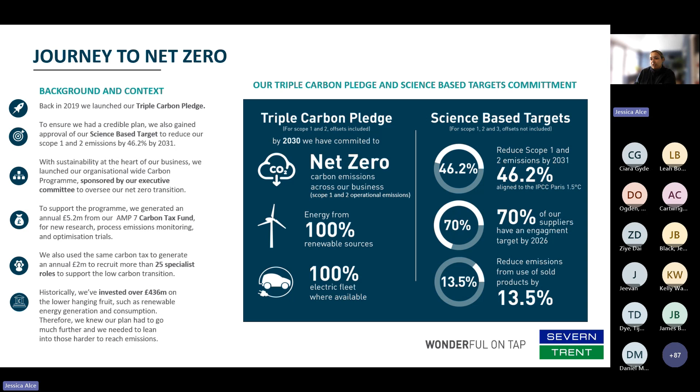In terms of where emissions come from, so just a bit of insight into that. Across wastewater treatment works, we have 3 types of emissions. First of all, it's carbon dioxide, and that is heat needed for some of our treatment processes, specifically our anaerobic digestion plants or our thermal hydrolysis plants which need natural gas to keep to the temperatures. We also have nitrous oxide, which is 280 times more potent than carbon dioxide, and that is emitted from our biological treatment processes.

We have fugitive biomethane, so the anaerobic digestion plants that we have produce biogas, which is a valuable resource, but sometimes leak methane into the atmosphere. In terms of scope 2, when we run our processes, we need to use that electricity.

So we do aim to produce that ourselves, or we buy REGO backed electricity, which means it's renewable energy guarantees of origin. In terms of scope 3, this is chemicals that we have to remove nutrients that can't go into the water course, such as phosphorus, and any embedded carbon, such as the concrete we have to build our assets.

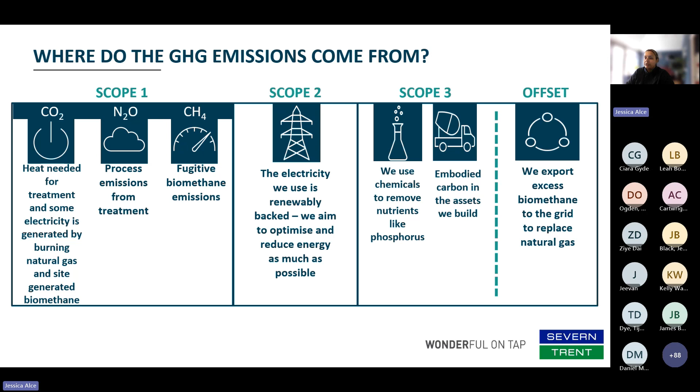And in the offset world, we do export any excess electricity or biogas to the grid. This then displaces fossil fuel-based gas and gives us what we call an offset. To give you some pictures of where we actually see these emissions on the site.

Our nitrous oxide byproduct is produced during nitrification or denitrification of wastewater treatment. This is emitted from activated sludge plants, trickling filters and nitrifying filters that we have on most of our bigger, larger wastewater treatment works. Methane is produced from our anaerobic digestion, and it's emitted from uncovered sludge holding tanks, cake pads, or incomplete combustion, such as flaring boilers or combined heat and power engines.

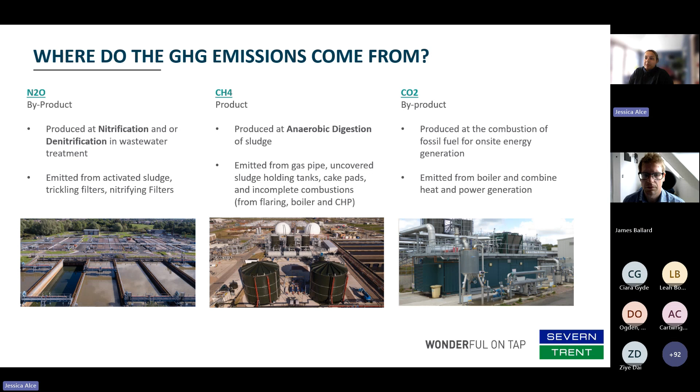As I mentioned earlier, carbon dioxide is mainly used for energy on site. So what is the approach that Severn Trent has taken to combat our carbon emissions?

The first thing we did is all about understanding our emissions. We really invested heavily in a monitoring program to monitor 40% of all of our flow into our works. And from this, we started to understand that the emissions from our works are more than what the carbon accounting workbook used for the water industry reports.

To give you an example, we have data that's around 4 times what the standard emission factors used in the carbon accounting workbook show. And we have taken a priority to understand our baseline so that we can understand how we can reduce, remove, or replace and optimize to reduce those emissions.

The second thing we've done is make sure that we use a hierarchy of management priorities, all about understanding how you remove that carbon. So you should always reduce, replace, remove, and offset.

So in terms of our larger net zero target and our net zero hub, all the solutions that we have been able to implement are following this hierarchy. And finally, we've been developing the industry blueprint known as our net zero hub at Strongford in the Stoke-on-Trent area.

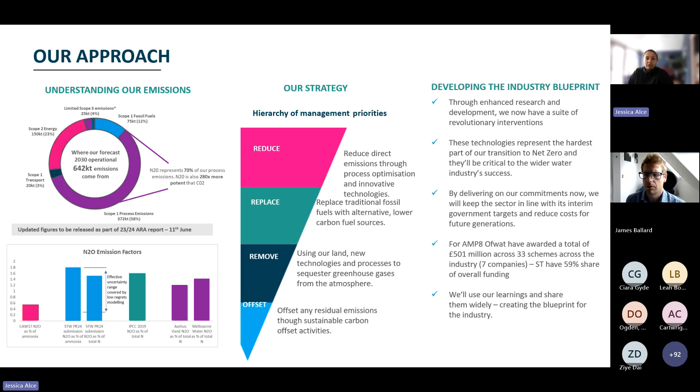So these are our modelled expenditure business cases. Ofwat awarded around 500 million across 33 schemes to deliver net zero, and of these 59% of that funding has come to Severn Trent through the technologies at the net zero hub, including the digital twin.

So just to quickly touch on the net zero hub. We've done a lot of work in carbon, we've done a lot of different trials, but the one thing that we really wanted to understand is how does that work in real life? How do you retrofit these technologies into aging assets, into live plants?

And the concept was to implement this at Strongford as a single flow sheet. This combines different types of technologies. We've got physical, biological, chemical, but we've also got the digital technologies, which is the digital twin.

So we're not going to be talking about the other technologies today. We're going to focus in on the digital twin. I'm now going to hand over to James to take you through what that means.

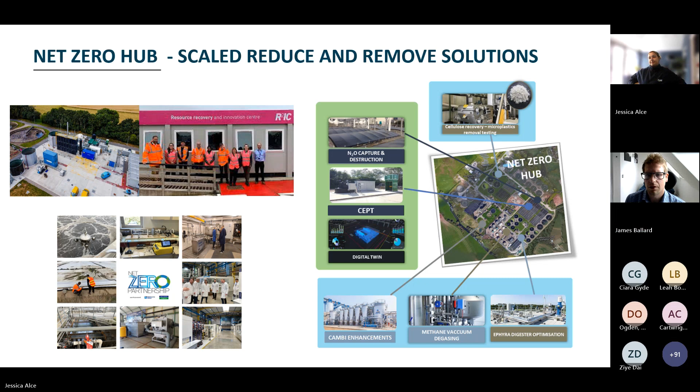Brill, thanks, Jess. Yep, hi everyone, James Ballard, Severn Trent as well as Jess. So strategic architect, and my background and focus is on control and automation.

So I'm here to open up the question that's on everyone's mind. What exactly is a digital twin and how does it fit into this story? And of course, I'm going to cut to the chase for you guys, because everybody's got a view and everybody's got a different answer for digital twins. So I'm going to be clear about what it means for us and set the scene for the rest of the presentation.

It's going to take you on our journey. So as a strategic architect, I need to take a step back and take a holistic view across the world that we're trying to build.

This is source to tap and drain to river. We're building a world where we're delivering really high quality drinking water and safely taking waste away.

So specifically think about the waste. You've got things like spills, floodings, pollutions, greenhouse gas emissions, energy, chemical. Across all of this source to tap, drain to river, we've got tens of thousands, possibly even hundreds of thousands of assets, pumps, valves. We've got treatment processes, we've got biological processes, we've got chemical processes.

So what we need to do is build a world where all of this is joined up and optimized. That's ultimately a world where we need to get to. So how does the digital twin fit in for us?

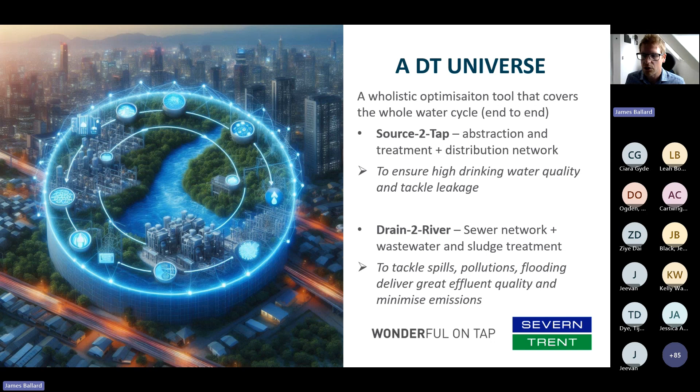We need to be building a tool that can interconnect, join, take data, simulate it, and create an optimization support that can help us really deliver. Because if you think about just how many variables there are, you've got the variables in all of your assets, your processes, environmental factors, weather. So there's a lot of variables, and we need some support.

So inspiration for digital twins. As I said before, it means different things to different people. We know we need to create this tool that can help us to optimize the end-to-end journey. What we don't know, and certainly what we didn't know when we started this project, is to what extent do these things help us. So 3D models, data-driven models, mechanistic models, user interfaces, how smart do they need to be?

How much analytics do we need? And really also, where do we get the benefits? So actually, how much benefit can be released in a short amount of time through visualization, maybe a user interface, versus how much benefit do we get through some really deep analytics and modeling?

And then the big question for all of these things, I'm sure they all have a part, and you'll hear about this as we go on, is how do we bring them all together? How can we build a digital twin that's scalable, sustainable, manageable, when it needs all of these different components and we need to join them all together?

To be really clear for us, we needed some capabilities. We needed to know what our twin needed to deliver in order to know that we've actually made a successful tool, and that it's doing what we need it to do in order to help us deliver that end-to-end optimization. So those three things: visualization, simulation, and optimization.

There's going to be an amount of benefit released when we can actually visualize what's going on right now. And that could be from sensor data all the way through to contextualized KPI information. So how am I performing today compared to yesterday? Just seeing that information contextualized for you can help you make better decisions.

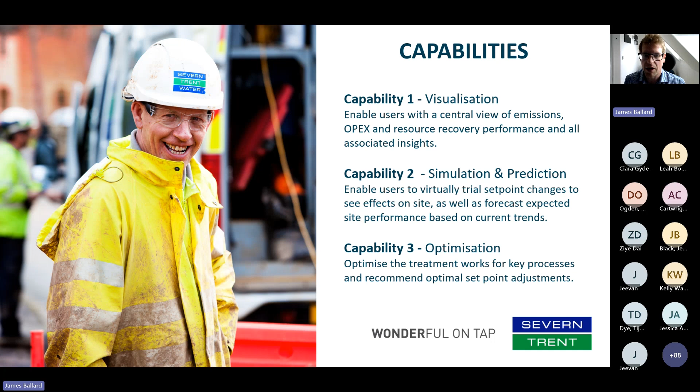And finally, optimization. Well, that is a real goal, isn't it? So how can we get to a place where the digital twin recommends settings, recommends set points, and actually tells us, based on the conditions, based on what we're going to see tomorrow, if you tweak things in a certain way, you're going to get the benefits that you want to see. So these are the three things we were aiming for.

Key considerations before I open up to the rest of the journey. We've got data. I'm going to talk a lot later on about, I'm sure everyone will, about availability, quality, and usability of data. So we definitely needed to consider what data do we need and how do we process it, the format, the type, the availability, everything there is to know about data.

Models, how many of them, which ones, in which order, and then the big question mark is people and processes. So we think a lot about the technology and the fact that we need a model and we need some data, but actually, who's looking at it? Who's maintaining it? Who's responding to it? How do we want them to respond to it? All of this needs to be solved and answered on our journey to creating this tool and this optimization support.

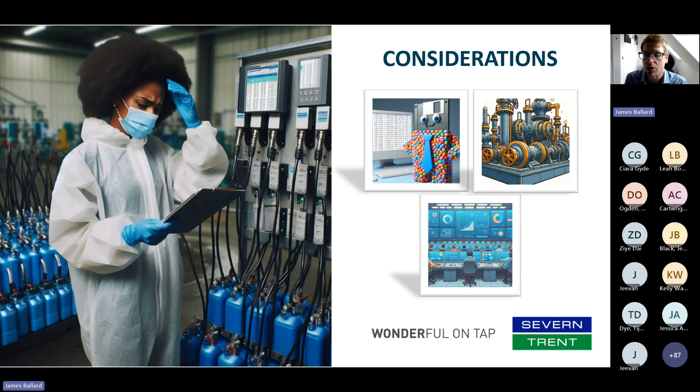Building on what Jess said earlier, off the back of this project, which has been incredibly successful, we are going to be taking this through AMP8 into scaling what we've done across 33 sites, specifically targeting greenhouse gas emissions. So although I take a step back and look at the holistic end-to-end journey, this is our starting point.

We need this to prove and deliver and demonstrate the power of optimization support. As we scale out and build through AMP8 and AMP9, we'll be looking to integrate and build on our digital twin capability across the end-to-end. But what we'll be talking to you about today will specifically target greenhouse gas emissions. And with that, I will hand over to Di to talk us through the beginning of Strongford.

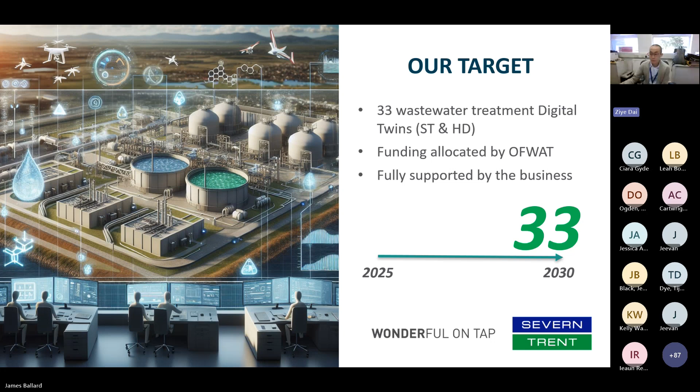Thank you so much, James. So my name is Di. I'm a senior tech expert in the innovation team at Severn Trent. I have a background in the treatment process, and I'm currently working on both the physical and digital aspects of the Strongford project. I'm going to give you more detail about Strongford and also our expectations for the Strongford digital twin.

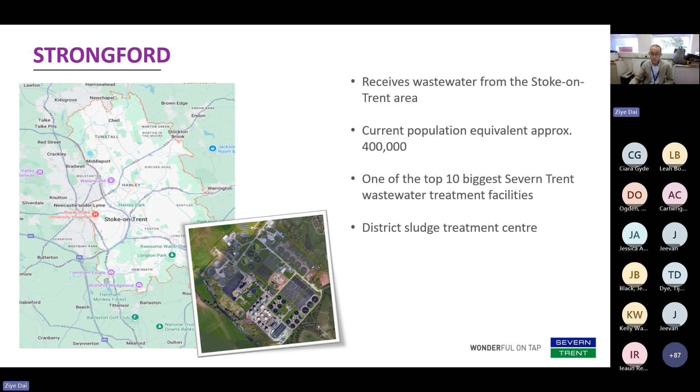Strongford is located in the north of the Severn Trent area and receives wastewater from surrounding places. The site serves a population equivalent of approximately 400,000 people, and is around the fourth or fifth biggest within Severn Trent. It functions not only as a wastewater treatment works, but also a district sludge treatment center, receiving sludge from our satellite sites.

From a process perspective, Strongford follows a typical treatment flowchart. On the water side, the treatment process includes preliminary treatment through screening and degritting, primary treatment via mechanical settlement, and secondary treatment mainly using the nitrifying activated sludge process.

On the sludge side, both indigenous sludge and imported sludge undergo thickening and dewatering first, then thermal hydrolysis, which enhances sludge digestibility and provides pasteurization, then anaerobic digestion producing biomethane, and post-digestion dewatering, resulting in biosolids suitable for agricultural use.

And finally, the sludge return liquor, which is something that we produce - the really strong wastewater we produce in the sludge treatment - is treated using a high rate activated sludge process before it is returned back to the head of the works.

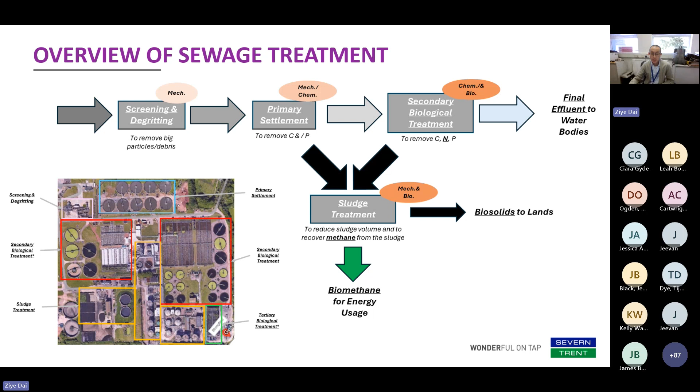So to recap a little bit what Jess previously said, the site has 3 key process emissions. The nitrous oxide generated during the biological nitrification process, such as activated sludge on site here, and also it actually comes from the wastewater and treatment side, because we use activated sludge to treat our wastewater.

And the methane emission that slips from our sludge treatment process, and also the carbon dioxide produced if we need to use natural gas on site to generate heat and electricity to meet the site's energy demand. Some is for the aeration or pumping for treating the wastewater, and also the heat for warming up our digester, and mainly for the THP process.

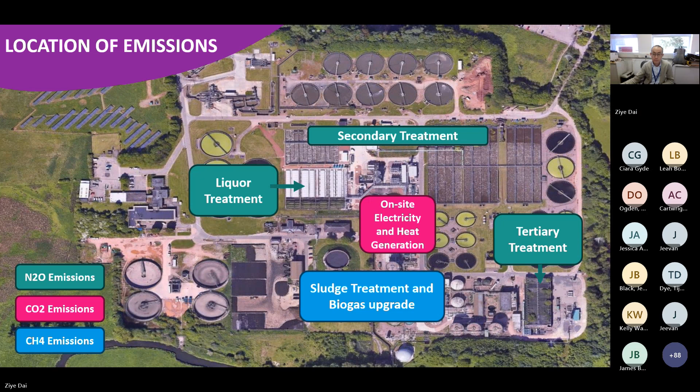Our expectation for the digital twin is to leverage advanced models to inform better operational control, and so reduce those 3 key types of emission I just mentioned. Therefore, the digital twin must be capable of visualizing, simulating, and most importantly, optimizing the process emissions.

Equally important is the quality of the final effluent, which has a direct impact on the environment. So the same requirements - visualization, simulation, and optimization - also apply to the final effluent quality. And ultimately, our goal is to minimize process emissions while ensuring consistently high effluent quality.

And so now I'm just going to pass on to Jeremy to talk about the model type and allocation. Thanks, Di. So I'm Jeremy Black. I'm Chief Process Engineer at AtkinsRéalis. I'm going to pick up from Di on what we established we want the digital twin to do as a long list of requirements.

And then how do we take that forward into deciding, well, how are we going to achieve this? How are we going to produce models? How are we going to collect the right data for them? And then I'll hand over to the other partners we've been working with to talk through how they've contributed towards that.

Just to start with, very simply, the main point is to establish what's the appropriate level of detail we want to go to. And there's a trade-off.

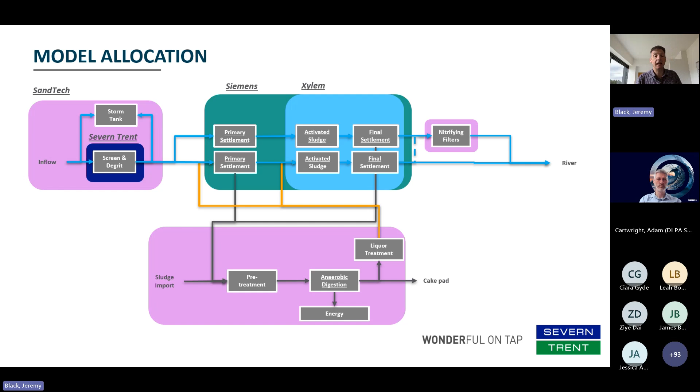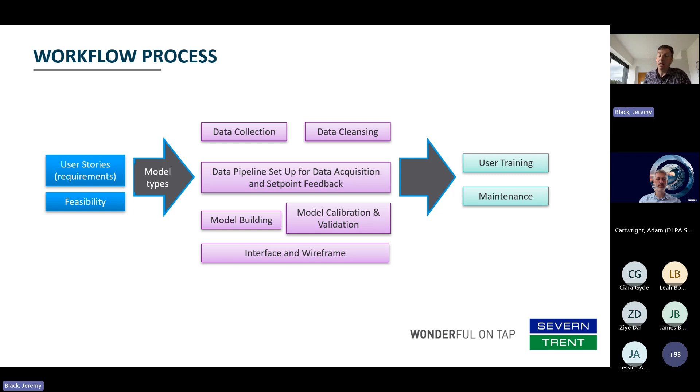Now I'm going to hand over to Adam from Siemens to introduce the work they've been doing with GPROMS.

Brilliant. Thank you, Jeremy. And a pleasure to speak to you all. What an exciting project this has been.

As Jeremy introduced, mechanistic modeling is where we take the fundamental understanding we have of the physics, the biology, and the chemistry, the equations that describe those processes, and bring those into the model for the actual plant itself. Importantly, this is not new for the water and wastewater industry, and it's also not new elsewhere.

Many of us will be familiar with using BioWin, Sumo, GPSX, West. There's a number of products that are already used for the design of plants using mechanistic models.

What's different in what we're talking about here is the real-time implementation of that type of complex mechanistic model in the operational environment, not just the design environment. And because there's a lot of equations brought together, a lot of information and data, the challenge is how do you run that in an operationally useful time frame?

The good news here is what we're doing as Siemens, and I think this is always essential in innovation, is looking outside and seeing what we can bring into our sector, to say okay, this is how we can benefit from investment that others have made. So in this case, it's using mechanistic modeling platforms that are used for real-time optimization in other industries and bringing it to water and wastewater.

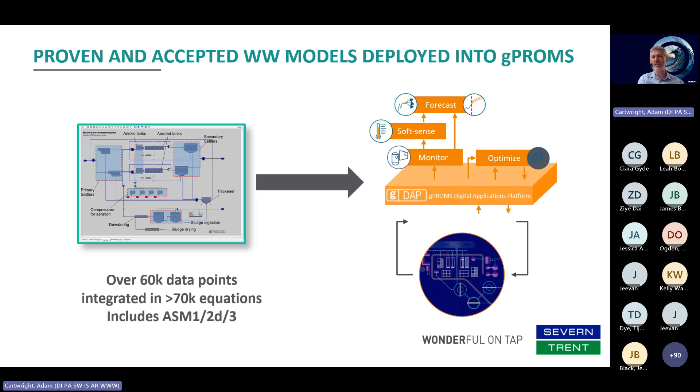So actually, what we're talking about here when you say GPROMs, that's just a Siemens product name. It doesn't matter. The key point here is we're just talking about using the mechanistic description we know and understand, and using that in a real-time environment.

So practically, what does that mean we're able to do? If we start off here on the left-hand side, bottom left, with monitoring, one of the things that is actually a foundation for all models, whether data-driven or mechanistic, is being able to ground truth the output of the model with what's actually being monitored on site.

And one of the benefits of having a model that you've validated running is that you can easily identify when you have data points on site that are outside of their normal trend. At that point, you can evaluate and see: is it a problem with the model, or actually, as is often the case, is that a sensor that is no longer working, drifting out of calibration, or a problem? So it helps you to monitor the site.

The next level beyond that is actually to be able to deploy soft sensors. This is where you don't have a physical measurement on site, but instead you have a derived insight which comes from the model. So, for example, biological oxygen demand, often that is something very difficult and not commonly monitored throughout the process, and that is something you now have a soft sensor for within the model itself.

And you can see a range of other different parameters there as well. So if you have a model that you've validated and tested, suddenly you gain greater insight into the different parts of the process.

What I'm going to be showing here is the simulation and optimization capabilities. It's going to look very much like something only a process engineer would want to trust, so if you're not from a process engineering background, don't worry, you'd probably never engage in this level of detail. What Jeevan will show later is the visualization end, which is what operators and users would interface with.

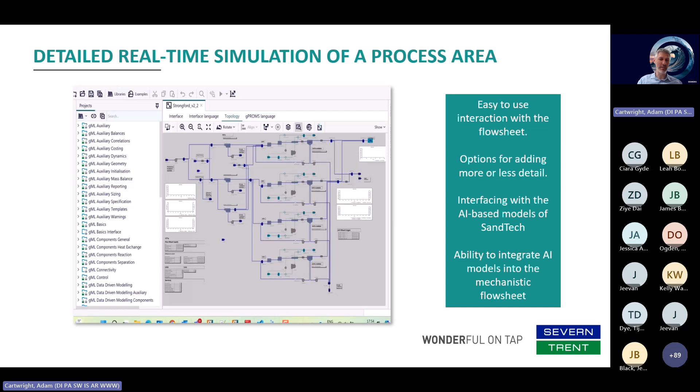Let's look at the next slide, where we'll see an example of the simulation in operation. Within the flow sheet itself, you can embed the inputs and see the outputs of the simulation for what comes in. You can set the different constraints.

Importantly here, we're talking about defining energy-based criteria. So all the different inputs, the chemicals, the ferric dosing, are included here. And then importantly, we've added the nitrous oxide modeling, which I'll expand on in a moment.

Once you set the constraints and limits of the scenario you want to run, you run that and get the output from the model. The output is then what gets pulled through into the visualization, which Jeevan will show you later.

Importantly, because you're looking at both the chemical inputs and the energy, while the focus here is on net zero and nitrous oxide, this allows you to do that within the context of the overall performance of the plant, to ensure it's done with an eye on OPEX and understanding the energy implications.

But also that you do this in a way that allows you to understand the final effluent constraints from your consent, and to ensure you operate with an appropriate level of risk margin to always meet those constraints. One of the things we've found is that the power of these models is it allows operators to better manage that risk margin, which is itself a great driver of efficiency.

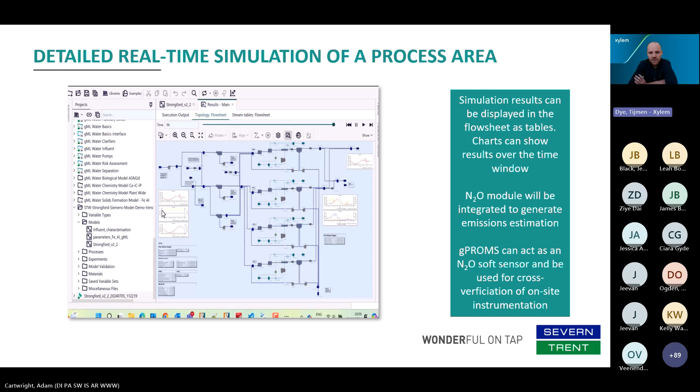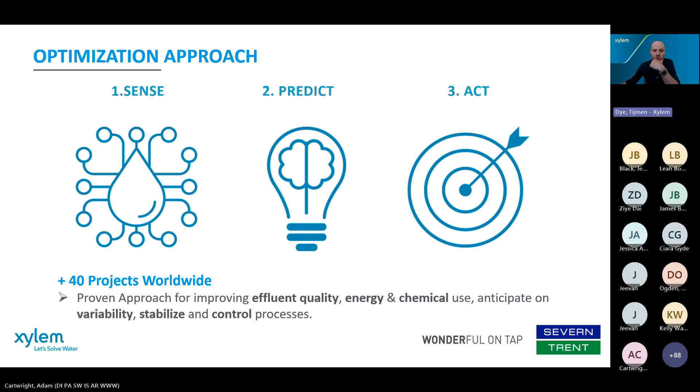I saw a comment go by that the slides aren't moving. Is that correct? I think you just need to take control. Tim and I still have control, so I've moved it on for you. Ah, there we go. Okay, is that back? Is that the right slide? Is it up to date?

In the project itself, we also combine our expertise with that of Cobalt Water. Cobalt Water has specific N2O expertise, and really their models lend themselves quite nicely to our existing treatment system optimization approach. So we combine our existing optimization capabilities on the energy and chemical front with the N2O expertise from Cobalt Water, and together through different AI or machine learning models, we build a single multi-objective optimization capability. And I'll touch on how that works in a couple of slides.

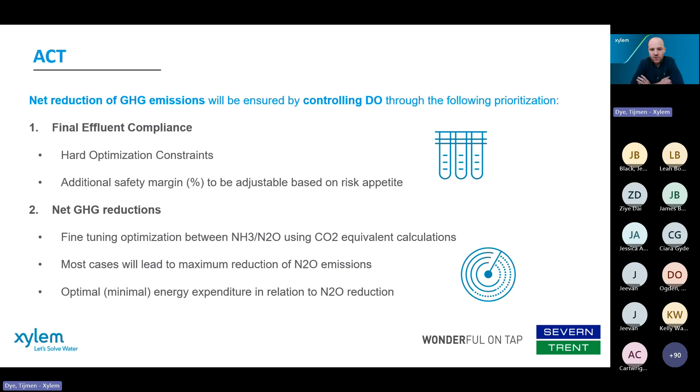So we expect to almost always aim for a maximal reduction of N2O emissions, unless the energy picture changes fundamentally. So that brings it to the end of my part - happy to take questions on that in the chat, and I'll hand over to Jeevan.

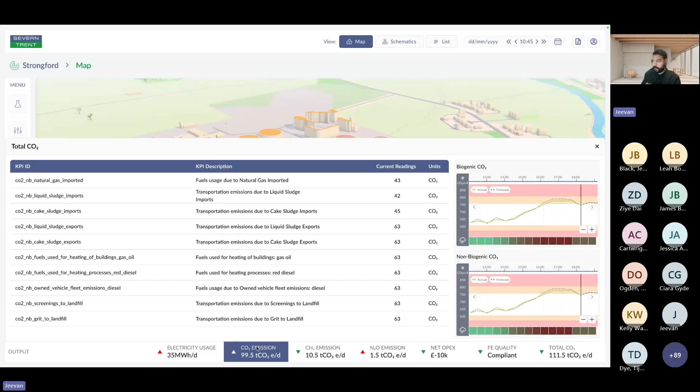What we do above and beyond that is provide the context around the data. So we reflect energy usage information as well as emissions information, broken down into its constituent gases, and show the context around that. You can get to see a breakdown of where each of the emissions come from, as well as a time series profile associated with that.

We also, as you've probably picked up from the view right now, the assets are color-coded into red, amber, green based on their criticality state. Underperforming assets are colored red. Those in an alert state are colored orange, and those that are performing well or optimally are colored green. This allows users to, at a glance, see where there's issues on site.

And if they wanted to, they could zoom into that particular treatment process and see the analytics that are pertinent to that. So we reflect that in terms of emissions, flow, and power, and we also reflect that in terms of golden measures, which is a Severn Trent way of reflecting performance measures at the site.

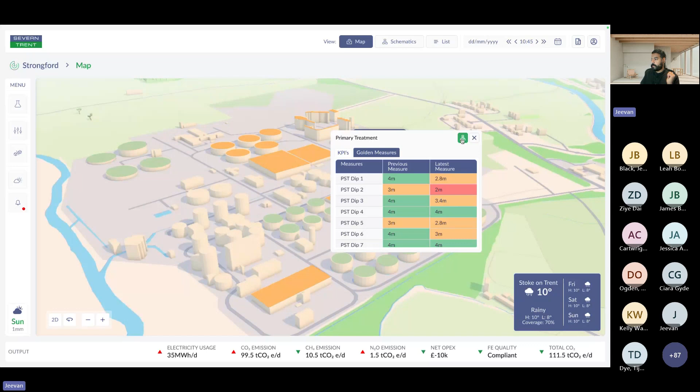Now you've seen the high-level view at the treatment stage level, but we also provide the view of the most granular elements of the system — what we call the schematic view. This shows the interconnection of individual treatment assets underneath that stage, as well as all of the various monitors that comprise that stage.

As James mentioned earlier, visualization is one element of the digital twin, but there's another that is about the predictive analytics. For that, we provide forecasts, where the models are available, of the measures and monitors of a treatment stage, so that you can get a view 24 hours in advance of performance. This enables users to see problems before they happen and resolve them before they happen. So that is capability one, which talks about visualization and a little bit of predictive analytics.

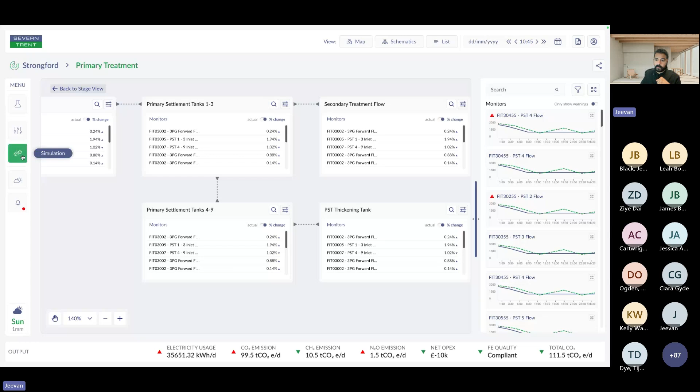What I'll do next is talk about simulations, which a user can configure via something we call the simulation wizard. A user enters this and can create a simulation by giving it a name, and following this, configure various elements of the simulation.

At the highest level, users can configure flow to the works in two ways. They could play a radar rainfall forecast through the system to anticipate what effects weather will have on the system. We also allow users to play arbitrary rainfall patterns, so they could simulate heavy rainfall on their catchment.

Users are also able to test taking assets in and out of service so that it can more effectively represent the way the site is configured at the moment. If something is out of service for maintenance, they can reflect it here, or if they wanted to simulate a maintenance scenario, they could do it via this interface as well.

We also allow users to configure in granular detail individual performance parameters. They could do, for example, sensitivity analyses on a range of DO parameters, as well as other parameters on site, such as how the sludge stream works, how the digesters are working, how the liquor treatment plant is working. All these are configurable via the parameter configuration page.

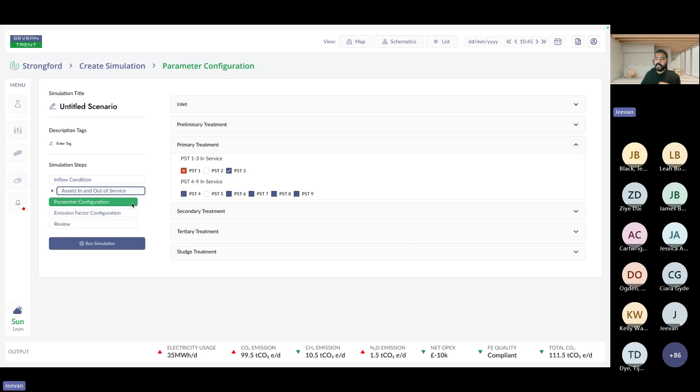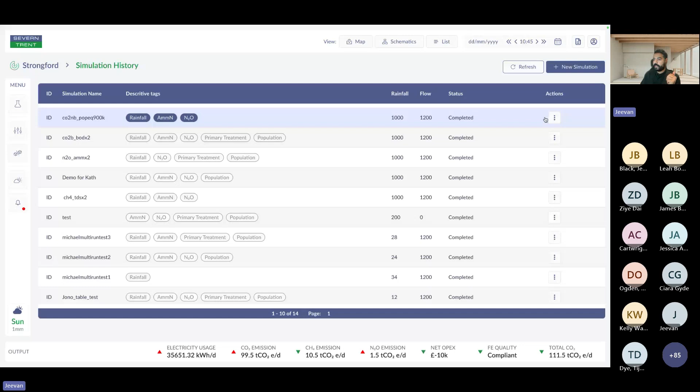Once everything is set up, a user simply clicks Run Simulation, and then they get presented with a backlog of simulations that have been run historically, and theirs is just queued on the back end for running. Once the simulation has been completed, a user can see the status of it and also view the result. This presents the simulated results for all of the relevant KPIs on the site.

It shows both what is the baseline performance, the current performance on the site, and what the site would do on the highest level if the simulation was run. We show this on the highest level as well as on the most granular level, so that a user can look at this and determine whether their planned changes to the site will be effective, and use this as a data-rationalized way of operating the site. So this is the simulation capability.

At this point, you can probably see that as a user you can come to a better-than-baseline way of operating the site. However, to achieve that true mathematical optimum, you need to run hundreds, maybe thousands of simulations, and that's not tractable from a human perspective.

So for this, we implement an AI optimization routine in the background that intelligently searches the parameter space of the site, and it pulls out the parameters that will drive down emissions performance while keeping effluent compliance in check and energy performance in check. We surface this to the user as optimization recommendations.

This is the series of set points that a user can influence. We present what the current set points are and what the optimized set points should be, so the user can plug this into the system themselves and drive the optimization of the site. We also show what the performance of the site will be without any optimization applied.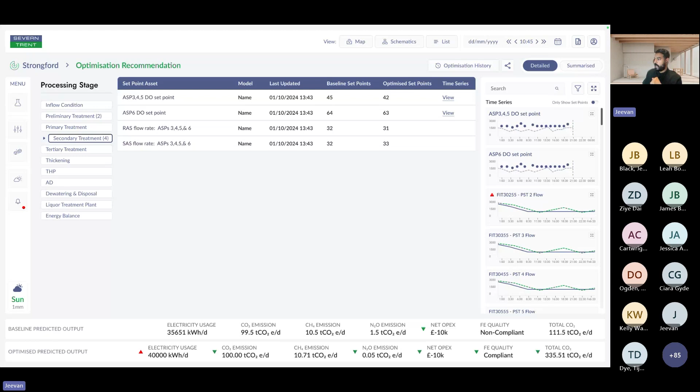And I think that is the demo nicely completed. I'll pass back to Leah so she can reshare the slides.

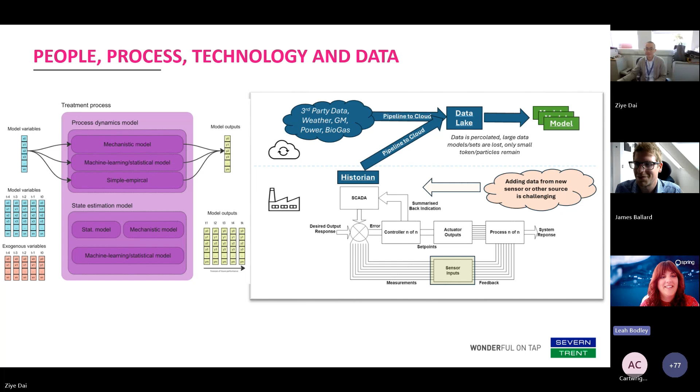Are you done, James? I thought you had one more slide on the conclusion and wrap up, but that's fine. Oh sorry, I actually forgot to take control. You're absolutely fine. Well, look, another slide - just as I planned it, I have one more slide.

To wrap up, data availability, usability and quality is up there because I can't emphasize that enough. In all the discussions around digital twins, whether for wastewater treatment works, water treatment works, networks, or digital twins of the catchment and external activities, the way you get your data, process it, and make it available at the right time to the right people in the right format matters. You need to avoid losing that data quality through the journey - getting processed in one SCADA system or a cloud engine gives you a filtered, less granular view into your system. Really mapping that out with data models is absolutely key. You can't skip that part and just say we'll get flow data, we'll get weather data - really digging into those data models is going to be worth it.

A digital twin is like a kitchen. I think about the ingredients as data - you can make sure you have the highest quality ingredients, but you need to think about how you're going to cook your lovely roast dinner. Some people might throw everything in the microwave and get okay mixed results, and you might just about enjoy it. Other people might steam some things, oven some things, and microwave other things. What we need to work out as a sector is, are we all going about it in the same way, cooking using the same devices, or in some instances is it better to just shove everything in the microwave? That's something we're learning and working through.